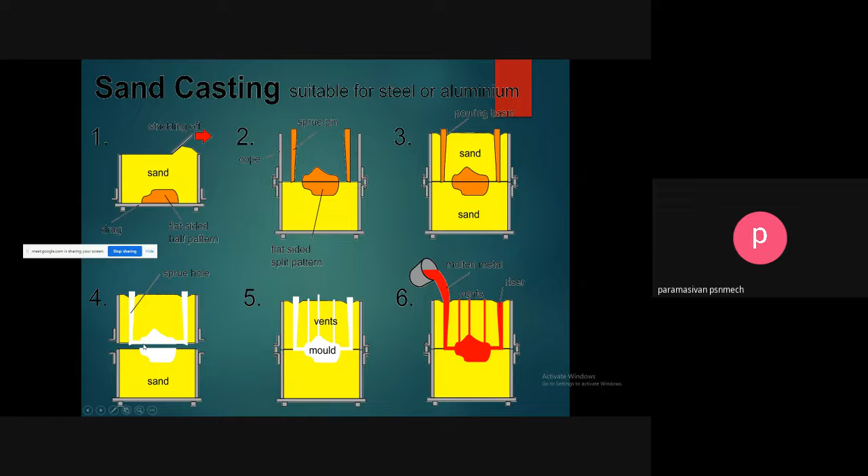Next, we discuss patterns. A pattern is the model of the casting. The pattern is one important tool used for making cavities in the mold into which molten metal is poured to produce a casting.

We have already seen that it is the model of the part to be produced. However, there are certain essential differences. It is slightly larger than the desired casting due to various allowances, which are described later. It may also have projections called core prints. It also has extra projections to produce runners, risers, and gates during the molding process.

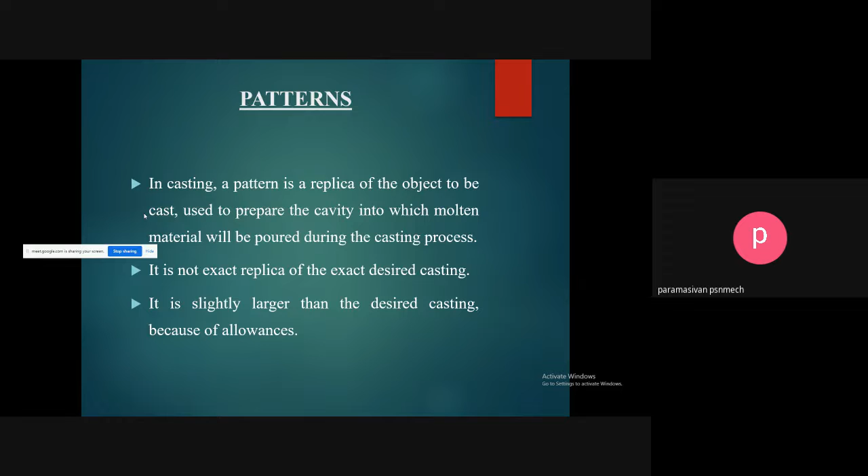Next, the types of patterns. Patterns are classified according to usage and form. The following factors are very useful for selection of patterns: first, size; number of components to be produced; method of casting. The following types of patterns are normally used in foundry.

First one, solid pattern. A solid pattern is made of a single solid piece without any joints, partings or loose pieces. Therefore it is called a solid or one-piece pattern. It is made exactly like the desired casting to be produced, with some allowances. It is used for making a few large simple castings.

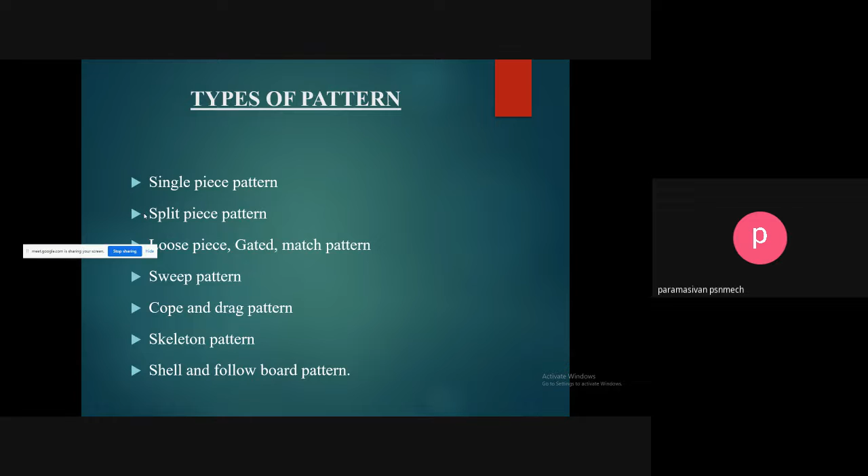Removal of the pattern from the sand is easy in the single piece pattern. The next pattern type is the split piece pattern.

One pattern which is carrying complex geometry cannot be removed from the mold if they are made by a single piece. Generally, a split pattern is made into two parts. One part is used to produce the lower half of the mold, whereas the other part is used to produce the upper half of the mold.

These two parts are assembled together in correct position by pins called dowel pins. The line separating the two parts is called the parting line. Split patterns are used for making symmetrical shaped castings like spheres, cylinders, bearings, and pulleys. If the split patterns are made in three pieces, it is called a three-piece pattern.

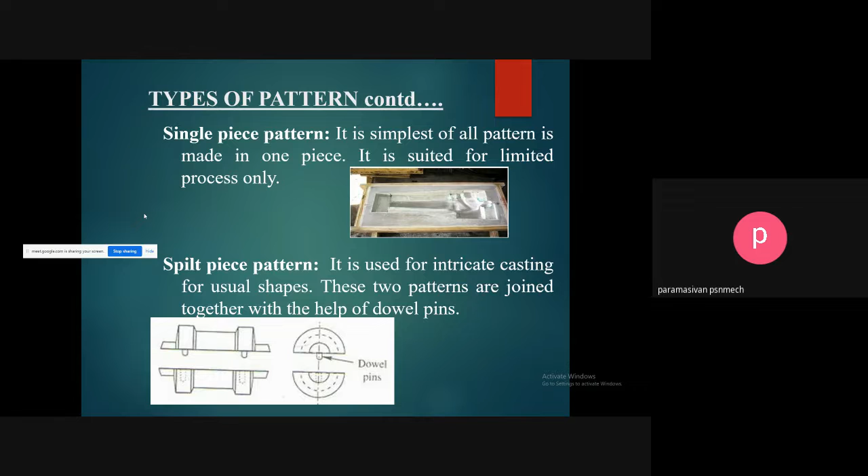Next pattern type is the loose piece pattern. If the pattern is made from a single piece having projections or back drafts which lie above or below the parting line, it is impossible to withdraw it from the mold. In such cases, the pattern is split into a solid pattern and loose pieces.

After making the mold, first the solid pattern is removed and then the loose pieces are removed without breaking the mold. This is called a loose piece pattern. Loose pieces are attached to the main body of the pattern by pins.

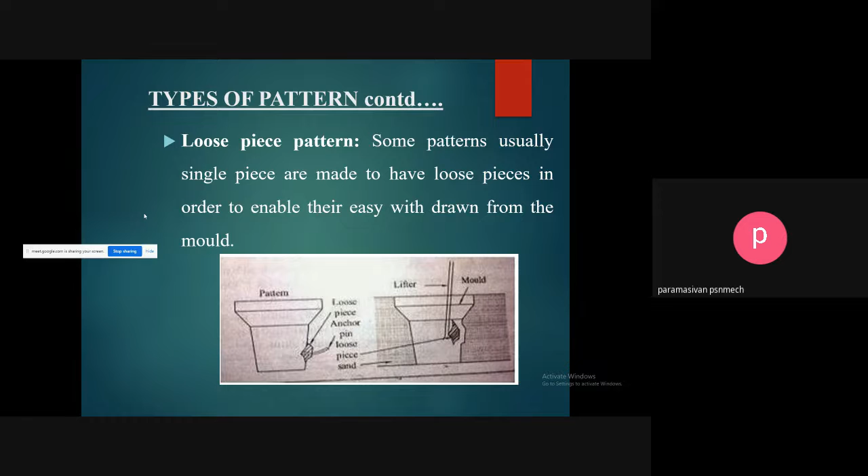Next is the match plate pattern. A match plate pattern is made of two halves mounted on both sides of a plate called the match plate, which is made of aluminum or wood. The match plate is accurately placed between the cope and drag flasks by means of locating pins. For small castings, many patterns can be mounted on the same match plate.

The runner and gates required for sending molten metal to the mold are attached in the match plate itself, so that very little hard work is required. Match plate patterns are used in machine molding. This type of pattern is used for small, accurate size and large numbers of castings. For example, piston rings of IC engines are produced by this process.

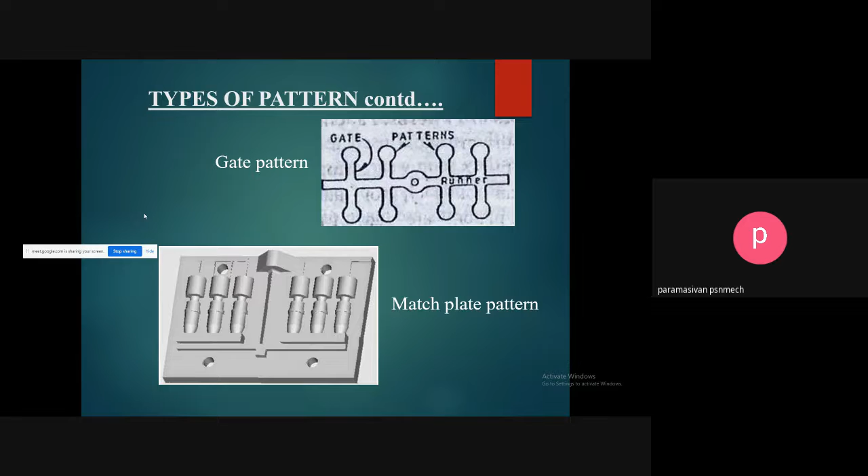Next pattern is the sweep pattern. Sweep patterns are mainly used to generate surfaces of revolution like cylinders, cones, and spheres in large castings. The sweep is a section or board made of wood or metal to the required cross section that is rotated about one edge to shape mold cavities having rotational symmetry. The board is fitted to a spindle.

The sand is appropriately rammed around the mold cavity. The sweep is rotated to form the mold cavity in the sand. Sweep patterns are used for making large and circular castings in loam molding.

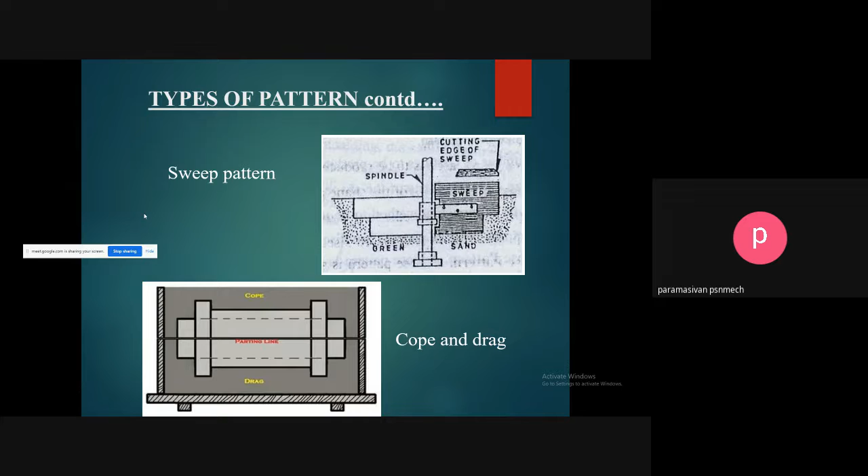Next pattern is the skeleton pattern. For larger castings of simple shape, if a solid pattern is made of wood, it will require a large amount of wood. Hence, it is very expensive. In such cases, a skeleton pattern is used instead of a full pattern. A skeleton pattern is a ribbed frame of the desired casting. This shape is made of wooden strips with a lot of openings and fitted to end supports.

First, the skeleton pattern is filled with loam sand. Ramming is done inside the openings in the pattern. The strickle board removes excess sand to give the correct shape. Large water pipes, turbine castings, and pipe bends are made by skeleton patterns. For round shapes, the pattern is made in two halves which are joined together by means of screws.

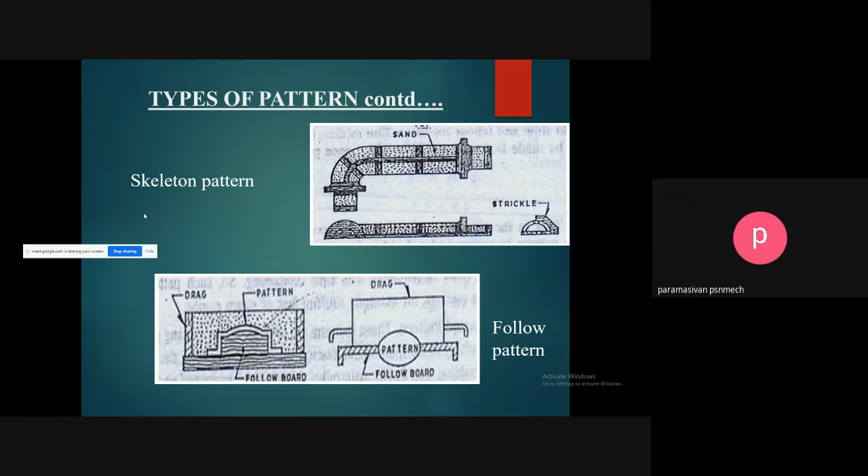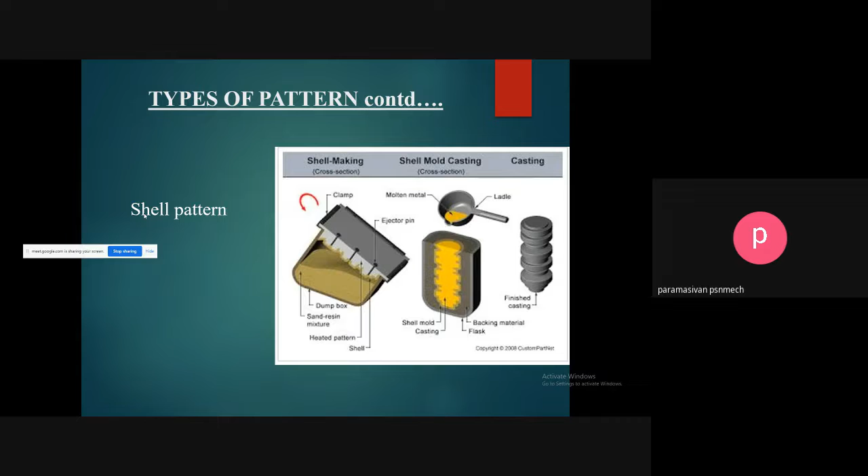Next pattern is the shell pattern. A shell pattern is a hollow pattern. Its outer shape is used for making the mold. The core is prepared using the inner surface of the pattern itself. This is also known as a block pattern. These patterns are usually made of metal. The pattern is made in two halves and joined accurately by dowels. These patterns are mainly used for making drainage fittings and pipe-like short bends.

What are the requirements of a good pattern? Secure the desired shape and size of the casting. Next, cheap and readily repairable. Next, simple in design for ease of manufacture. Light in mass and convenient to handle. Having high strength and long life in order to make as many molds as required.

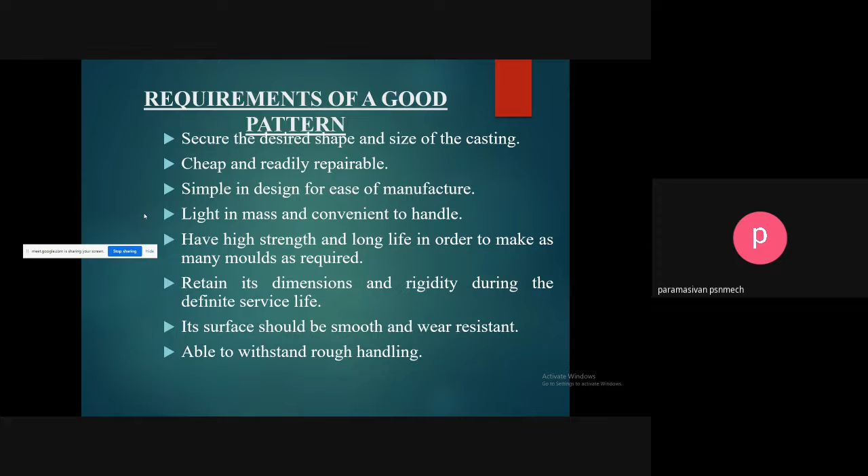This is for mass production. Retain its dimensions and rigidity during the definite service life. Its surface should be smooth and wear resistant and able to withstand rough handling.

The design considerations in patterns. First point, proper allowances should be provided in the pattern. The parting line should be carefully selected, and proper material should always be selected. The wall thickness and section should be kept as uniform as possible.

Abrupt changes should invariably be avoided. The use of offset parting instead of cores should be encouraged to as great an extent as possible.

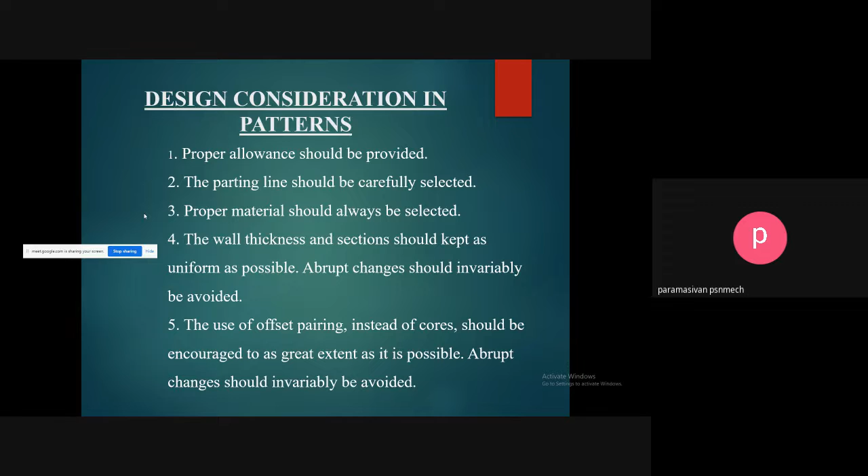The pattern layouts. Pattern making consists of two different stages: to prepare a layout and to shape the different parts. The layout consists of the following steps. First, study the drawing of the pattern and select a wood that can suitably accommodate two views. Take one surface of the wood as base and plane the adjacent surface.

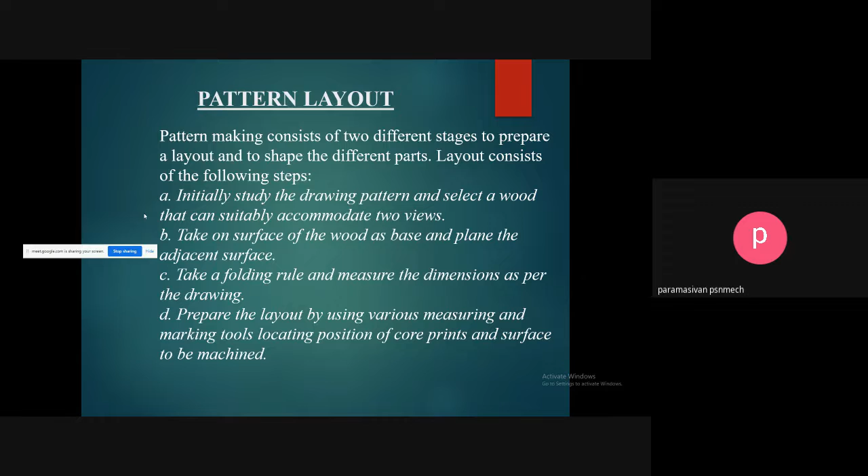Take a folding rule and measure the dimensions as per the drawing, and make a proper layout using various measuring and marking tools, locating the position of core prints and surfaces to be machined. The pattern materials are wood, metal, and plastics, for example epoxy resin.

Wood is the material commonly used for pattern making. Generally, teak wood, white pine, and rose wood are used for making patterns. Laminated wooden sheets are also used for getting accuracy, surface finish and long life. These woods should not contain more than 10% moisture to avoid warping and distortion during subsequent drying.

A metal spray coating up to 0.25 mm thick may be given on the wooden pattern. Zinc and aluminum are used for coating the wooden surface to avoid moisture absorption and give a good surface finish.

The wood pattern is light in weight, cheap and easily available. It is easy to work, easy to cut and easy to fabricate. It can be easily repaired. It can be easily smoothed by applying varnishes and paints.